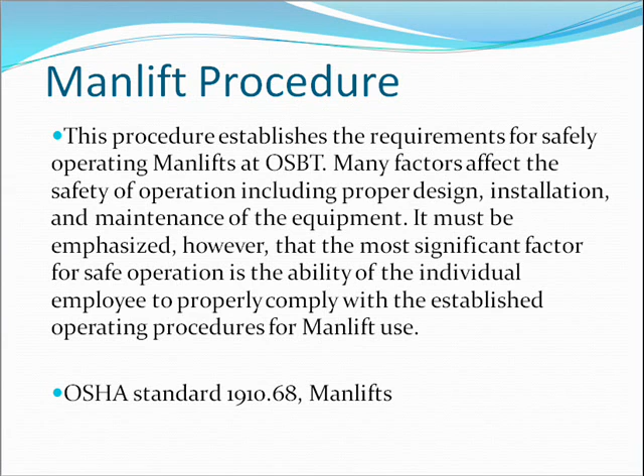Manlift procedure. Hazards. Electrocution. One of the most common and deadly hazards associated with manlifts is electrocution from contact with electrical wires and conductors. ANSI and OSHA standards specify minimum safe distances that are to be maintained while working in a manlift. If these distances cannot be achieved, do not use the equipment.

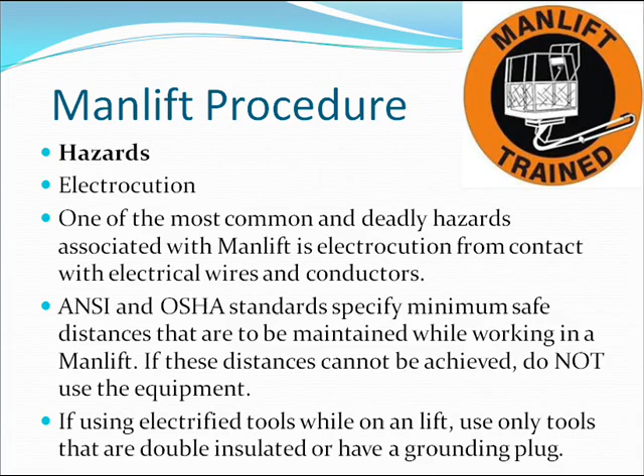If using electrified tools while on a lift, use only tools that are double insulated or have a grounding plug. If using an electromechanical model lift, ensure that the proper gauge of extension cord wire is used and that it is in good condition and equipped with a grounding plug. Do not operate the machine outdoors if there is a threat of lightning.

In fact, do not operate during any type of inclement weather, including windy conditions, since fall and tip-over hazards are exaggerated in these conditions. Personnel on the ground are prohibited from operating the ground controls when a manlift is in contact with a live electrical source until such time as the electrical source is de-energized.

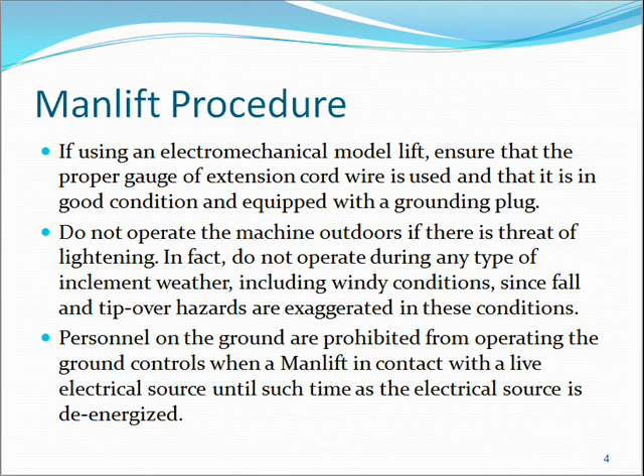Manlift procedures. Hazards. Tip over and collapse. Never exceed the manufacturer's specified maximum load, which includes the weight of the personnel and all tools, supplies, equipment, etc. that will be on the platform. Do not operate on surfaces that exceed the manufacturer's maximum slope, typically 5% or less. Always use wheel chocks and brakes when operating on any slope.

Set up on a firm surface, well away from drop-offs. When navigating a lift that is designed to move with the platform extended, avoid debris, bumps, depressions, or potholes. Do not drive over floor grates or covers. Never exceed the manufacturer's maximum speed recommendations. Know the type and proper usage of stabilizing mechanisms used on the lifts that you operate. Do not attempt to move or adjust stabilizing mechanisms while the platform is raised.

Never position or tie off the lift or platform against a wall, structure, or other surface. Maintain the intended center of gravity by evenly dispersing loads on the platform. Never attempt to increase the surface area of the platform with planks, boards, or other devices. Do not let materials extend over the edge of the platform. Do not hang tools or equipment off the sides of the rails of the platform.

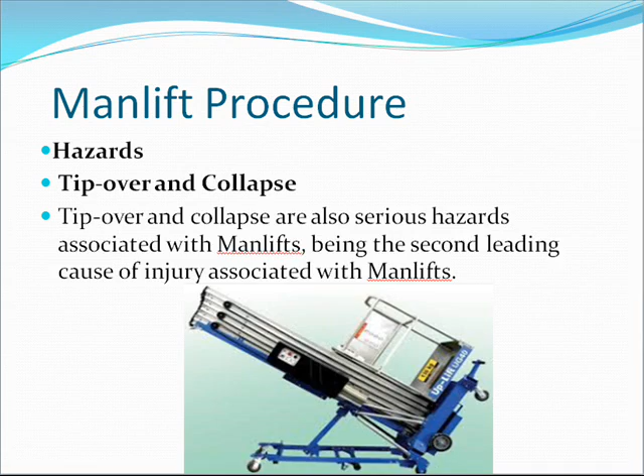Manlift procedures. Hazards dealing with falls. Falling from a lift is another hazard that must be recognized and steps taken to mitigate the risk. Guardrails typically provide adequate protection for scissor lifts and vertical masts that are stationary while the platform is extended, and the platform raises straight up from its base, so long as work activities and practices do not defeat the protection afforded by the guardrail. Full-body harness personal fall arrest systems must be used when operating all boom type lifts.

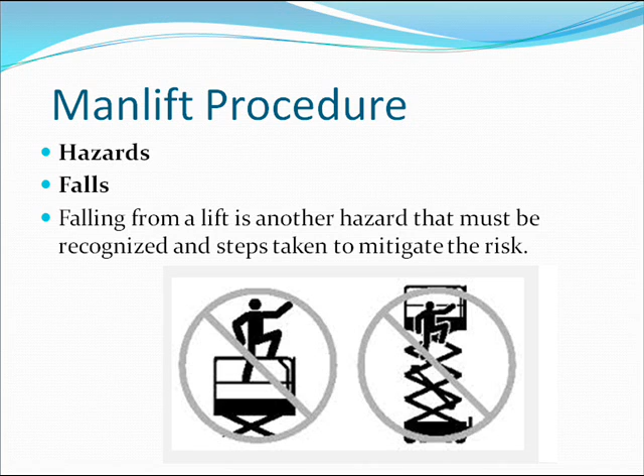Manlift procedure. Hazards dealing with collisions. Collision hazards can exist both overhead and on the ground. To avoid collision hazards, lock out overhead cranes that are located within the working distance of the lift. Look below before lowering a platform to verify that persons or objects are not present. Give warning of your intent to descend, by audible alarm or voice communications. Avoid setting up in high traffic areas.

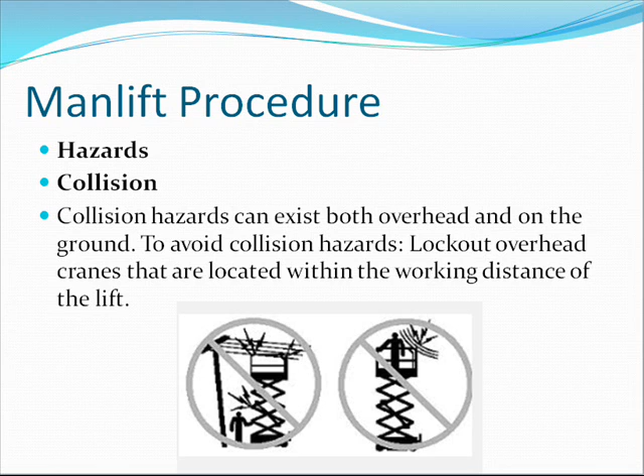Manlift procedure, dealing with hazardous atmospheres. There are a couple of things that must be considered with respect to potentially hazardous atmospheres. The first is the job site where the lift is necessary. Manlifts can create sparks that could ignite flammable vapors, fibers, or dust that may be in the atmosphere. Under no circumstances should a lift be operated in a hazardous location. This includes an explosive or flammable atmosphere.

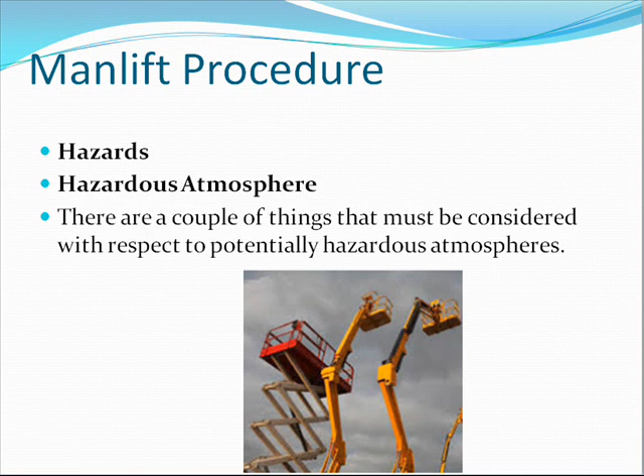Manlift procedure, training. Training will be provided to all employees prior to operating a manlift.

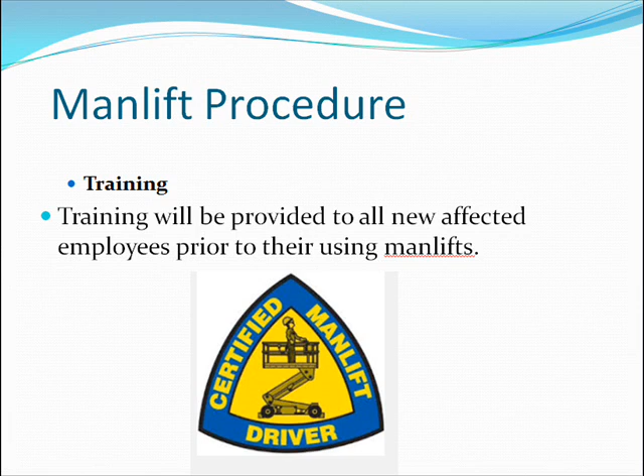This concludes manlift training. Please copy and paste the test link into your browser and begin the quiz.